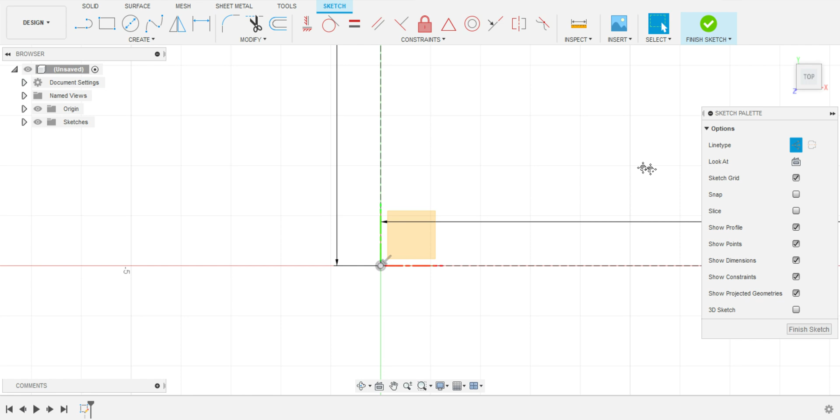We're going to be making a coffee table here, and of course I lay out the construction lines. In the event that I need to mirror stuff, I know these will come in handy. It also gives me the overall dimension of the project I'm going to be building. In this case, 54 inches by 36 inches is what I'm shooting for on this table.

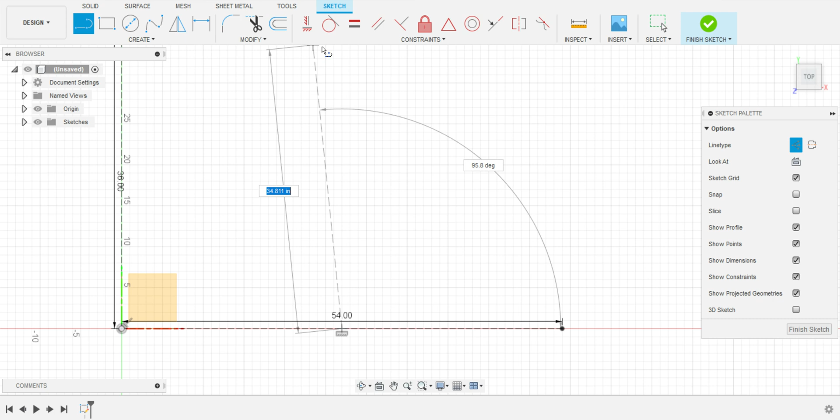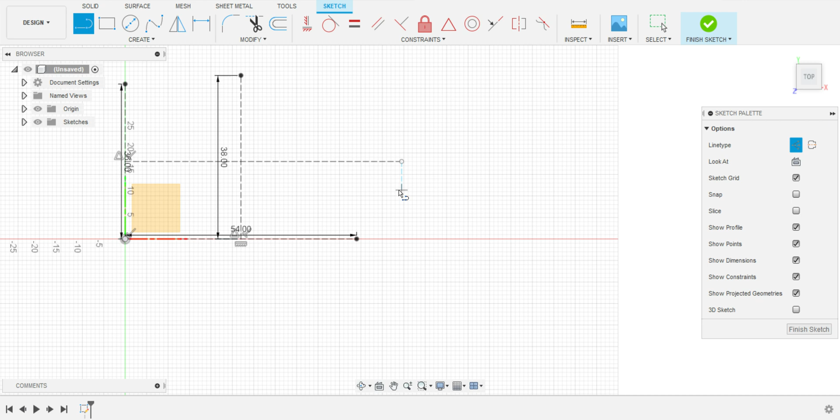On this one, I end up doing the sketch on the bottom plane all at once, as I like to do, and then I extrude up using the offset feature, which is nice to know, especially when you're building furniture in Fusion 360. I found this idea online, this table, to be honest.

I would probably build it differently now because I feel like the amount of wood it's going to need, or the size of the wood, is going to be astronomically expensive. So this may be a project that is put on the back burner and done at a later date, for sure. But it's a good way to learn some of the things in Fusion 360, so hope you enjoy.

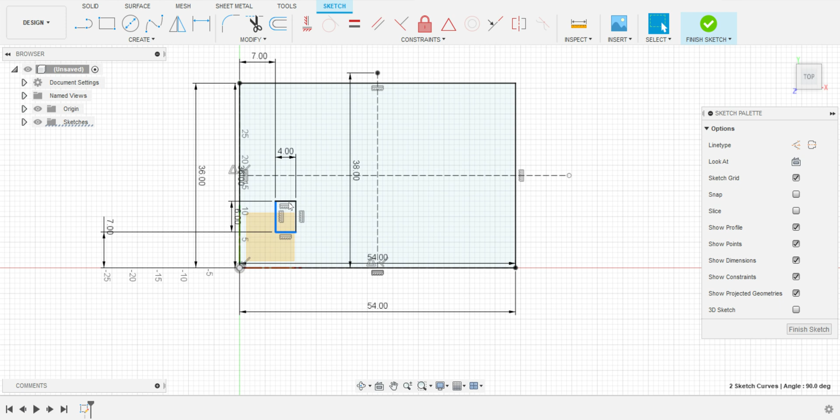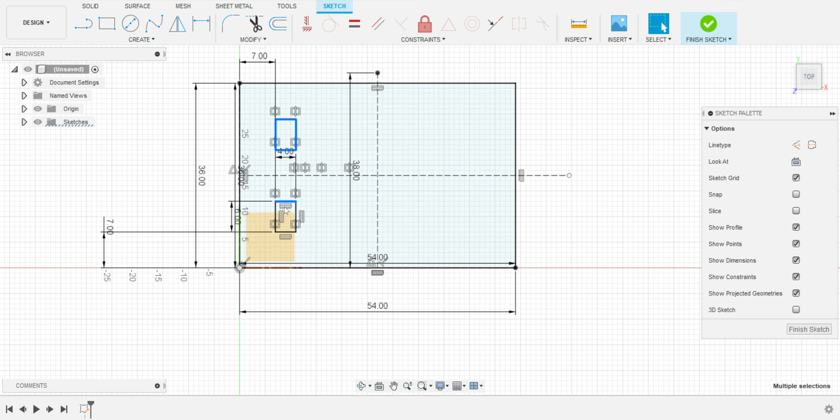Just laying out the legs here, and again, this is when I start really noticing that I am going to be using wood that is going to be very expensive, because these are very large for the legs. Again, it's going to be a glass top, but the material for the base is all wood, and it is seemingly getting more and more expensive as I draw this sketch, but I stick with it and keep on moving.

As you can see here, I'm using the construction lines that I implemented early on, which speeds up the process in Fusion 360 pretty quick.

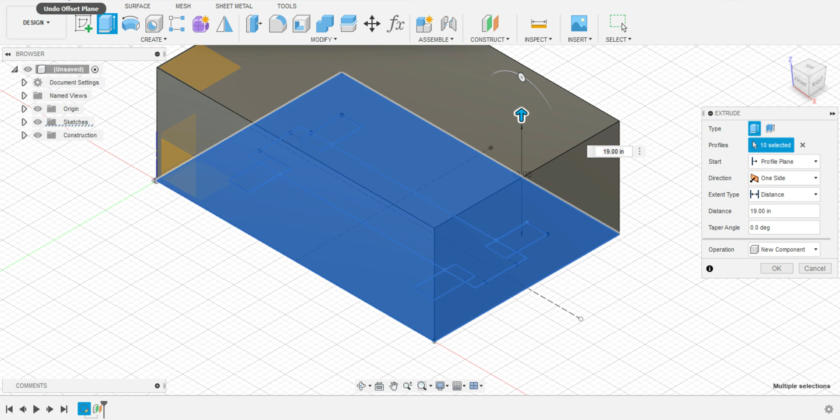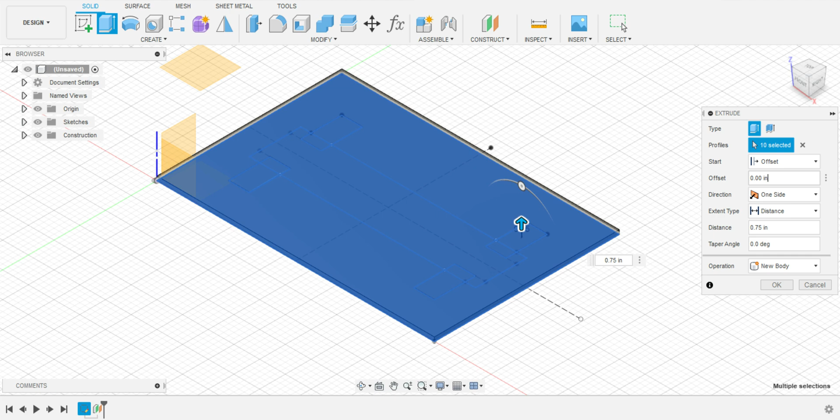Now I am going to be extruding here, as I said, at an offset, because I know the height of the table that I want, though I don't remember what I selected. I know it's going to be about 3/4 inch glass, which is pretty thick and expensive as well. That may change. And yeah, offset it 19 inches to the top of the table. So again, the offset feature being used during your extrusion phase is ideal.

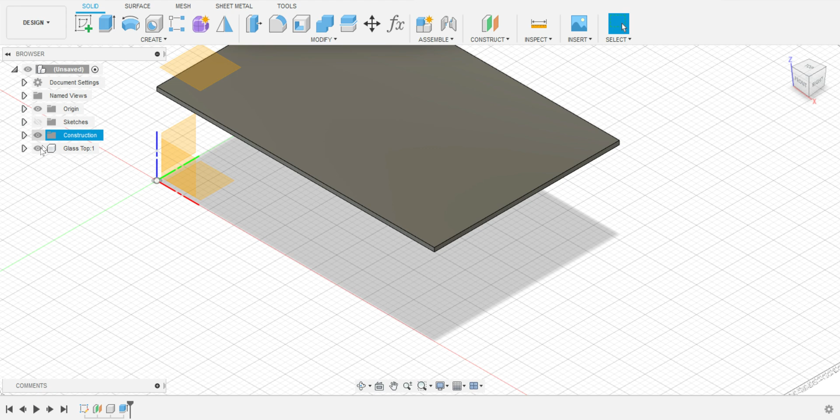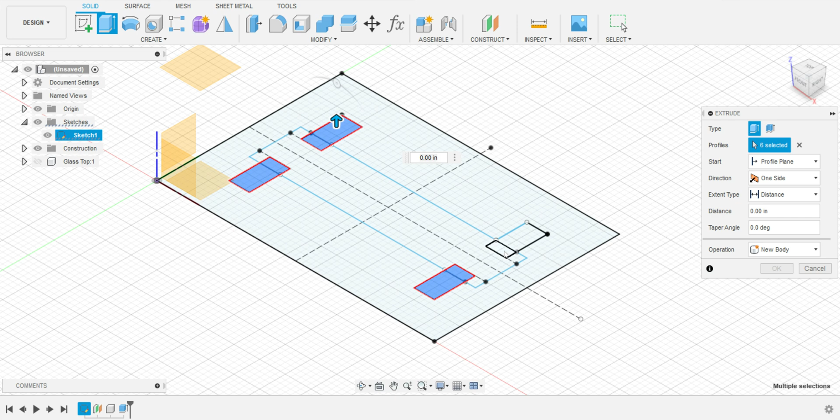And I didn't use parametric modeling on this project, which may have been a good one to show you, because some tables you may want to do an end table instead of a coffee table, so obviously it's going to be much smaller, and parametric modeling would have been an ideal technique for this particular piece of furniture. But this design was, again, a one-off, not going to be replicated, and probably not going to be built, as you'll see at the very end how substantial the base of the table is.

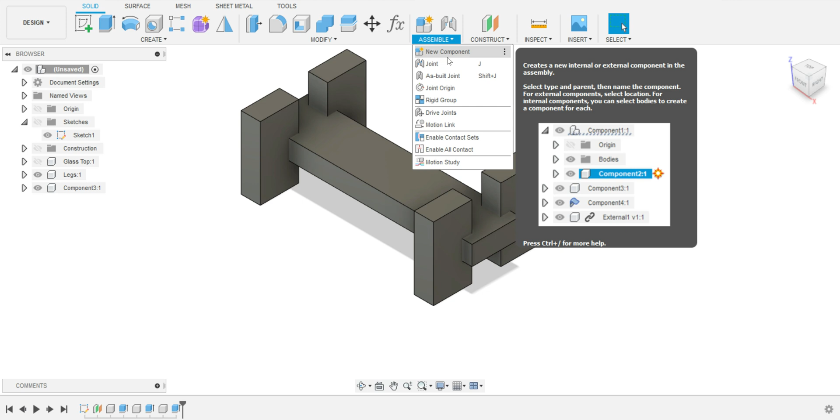Now we're getting into the feature called Combine in Fusion 360, and the beauty of this feature, especially in woodworking, is you can say you want to add dovetails, or you're mortising in the pieces and you want to show someone they're not going to just screw this together, it needs to be mortised in.

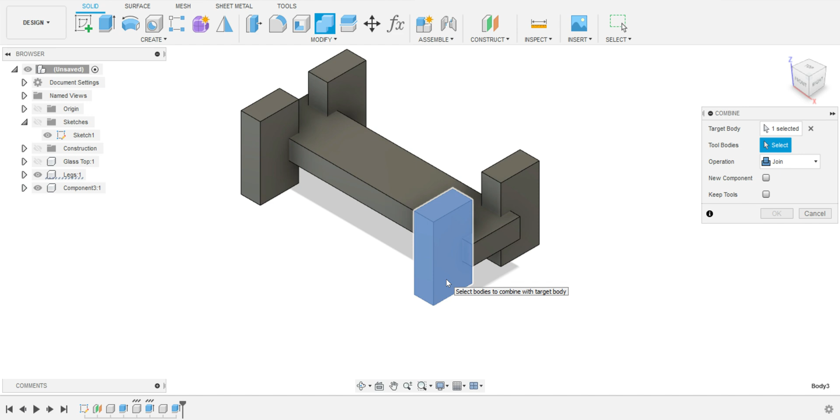This feature allows you to cut into some of the pieces, in this case the legs, and I want that center piece to be separate, but I also want someone using this set of plans to know that the legs need to be cut and not just left as big blocks, because you may be standing there trying to figure out how this center piece is going to go into these legs. So I need to show the customer that this middle piece is in fact going to be its own solid piece, and the legs themselves are what gets cut.

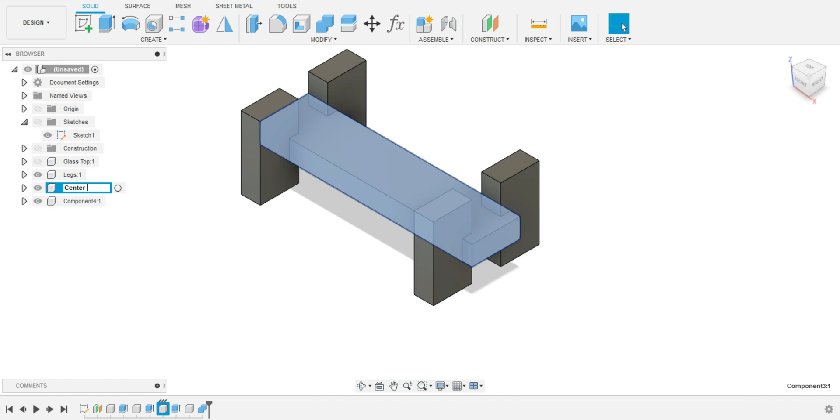Otherwise, if you cut the opposite piece, then you would have zero support, obviously. So I show you, I believe, on this one what not to do and what to do in order to make this happen. So pay close attention to this, because this is a feature that comes in handy all the time, literally all the time, when building furniture, especially in Fusion 360.

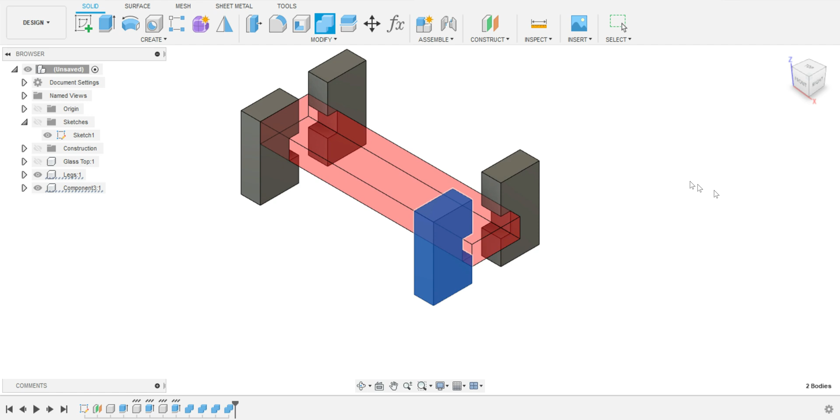Okay, now you can clearly see that this is correct. You can click on the middle piece here, support, and drag it away and see that the legs have their cutouts where they need to be.

And by the looks of this, it would be a massive undertaking to actually build. I am pretty sure that if someone wanted me to build this, I would pass on it unless they wanted to pay a lot of money.

I don't even know that my tools would work on something this large. My table saw would definitely struggle, and I would probably have to use a miter saw, which I could probably do to cut this size lumber.

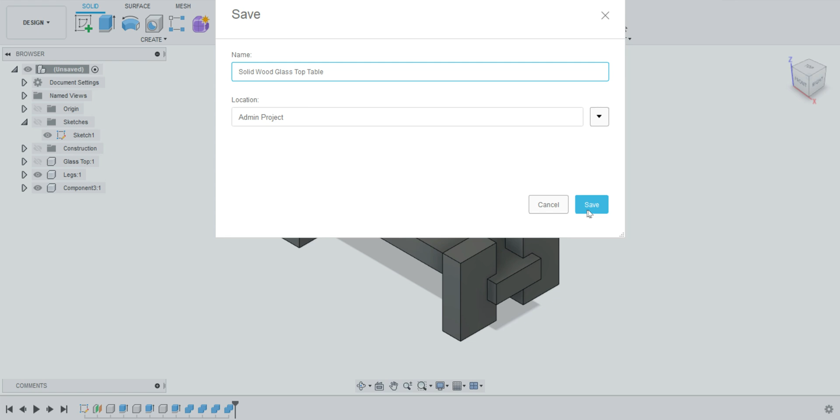But just the sheer weight of all this, dragging it around would be a nightmare, and then having to deliver it. I pretty much talked myself out of building this particular table, unless I downsize the material, which I think will look better anyway. It looks kind of bulky, but anyway, to add glass, it's pretty simple.

It's also in your appearances, so you would hit A in Fusion 360 and look for the glass section, and there's many different types of glass, which I will show you here. Different colors, different looks. If you wanted to show your customer something a little different, a little creative, you can get pretty creative with the glass.

Anyway, I hope you enjoyed, and there will be a lot more to come. Thank you.